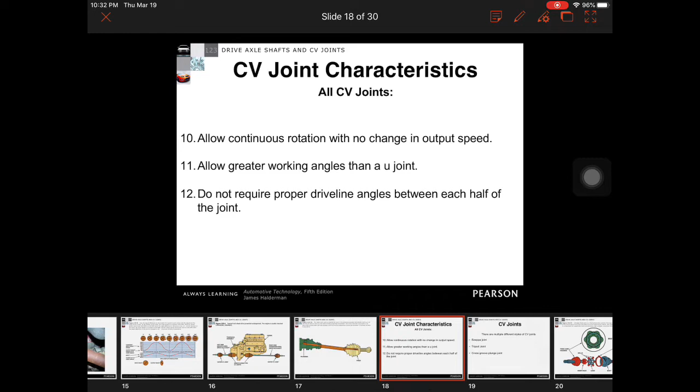I want to hit on one thing here and let you guys know that there are going to be a couple different styles of CV joints. The first one is a Rzeppa joint, actually pronounced Shepa, just so you know. But however you want to say it, the Rzeppa or the Shepa joint is the first joint we have, and then we have what's known as a tripod joint, and then a cross groove plunge joint. Now I do want to stress that there are actually a couple different extra styles of joints, but these are probably the main ones we're going to classify them into.

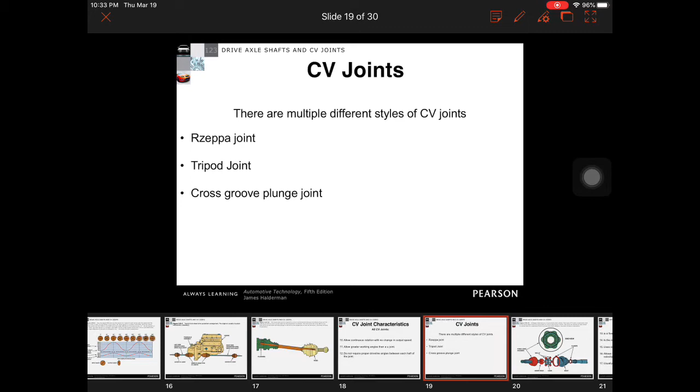So if you guys have any sockets and you've ever used a U-joint swivel, you know that you don't want to use those on an impact, because with an impact they get to be really dangerous. However, a CV swivel is going to be something really similar to this, maybe not quite so complex, but those are great for use on an impact. They don't really give you any fits, they're not dangerous to use.

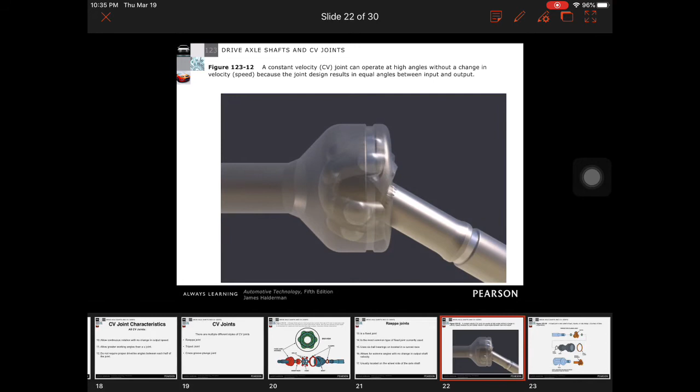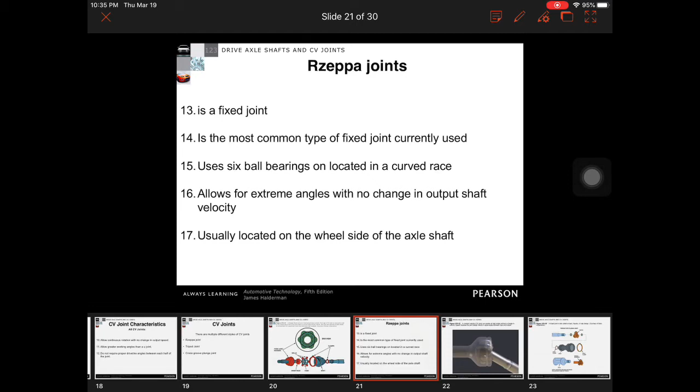Okay, so on Shepa joint or Rzeppa, one thing we need to know is it is a fixed joint, and it is probably the most common type of fixed joint currently used. It's going to use 6 ball bearings located in a curved race, and it allows for extreme angles with no change in output shaft velocity. It's usually going to be located on the wheel side of the axle shaft.

And typically we'll find the fixed joint out by the axle or out by the wheel and the hub, because there's not a whole lot of extra clearance for anything to move, because your spring and your strut assembly and your A-arm and everything is kind of right there, so it's hard to have any extra room.

Now that's actually a plunge joint, which means as the suspension moves and the distance between the transmission and the wheel changes, our CV shaft is able to move in and out a little bit. This also has to move because when we turn the wheel, it changes the distance from the CV shaft to the transmission. So really this is just another style of CV shaft that allows us to transmit power while still letting the half shaft flex in and out.

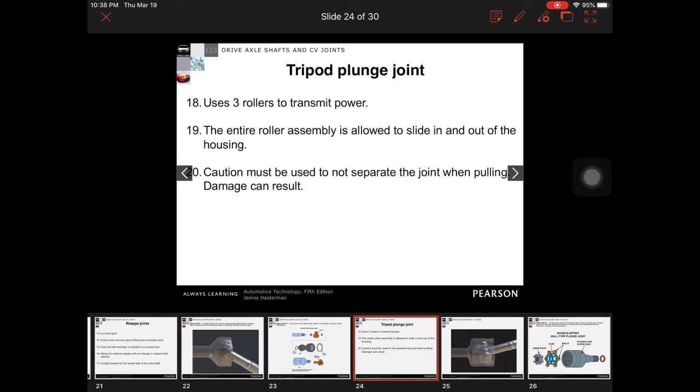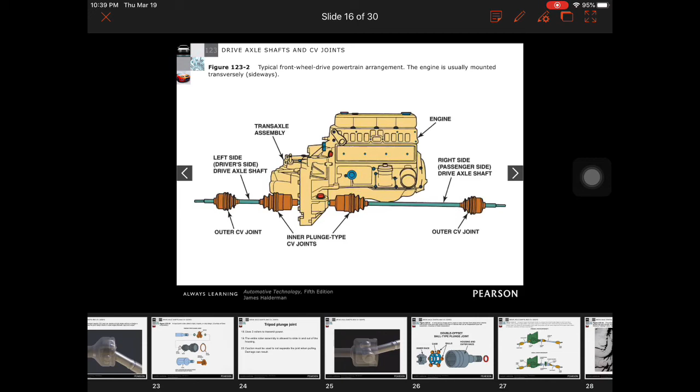And if that happens, you're pretty well stuck, and your only choice is to, at minimum, take the boot off with the one-time use clamps, then put it all back together, reassemble it, and use it. So it's something we want to be careful about, because if that happens, you're kind of screwed.

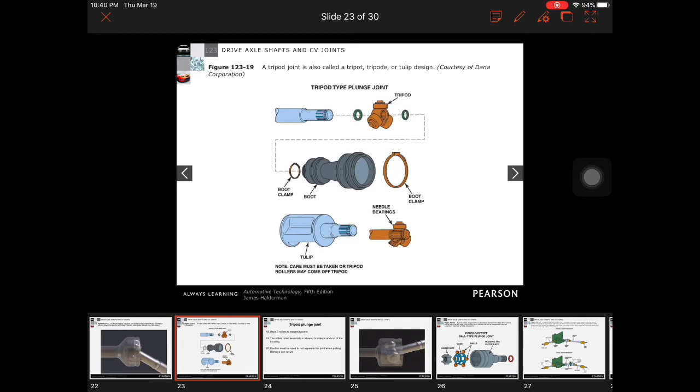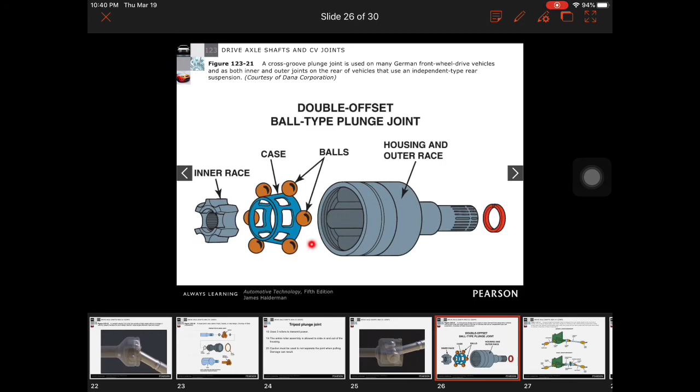I do want to let you guys know it doesn't mean we have to have just those 3 bearings. We can also have something called a double offset ball type plunge joint. Think of it basically like a tripod plunge joint, but the difference is this one actually uses 6 balls instead of those 3 rollers, and it's moving in and out. Same issue - you pull it out too far, the balls are going to fall out and lay in the boot, so you still have to be careful, and all the same rules apply. But you could see something that looks like this as opposed to this.

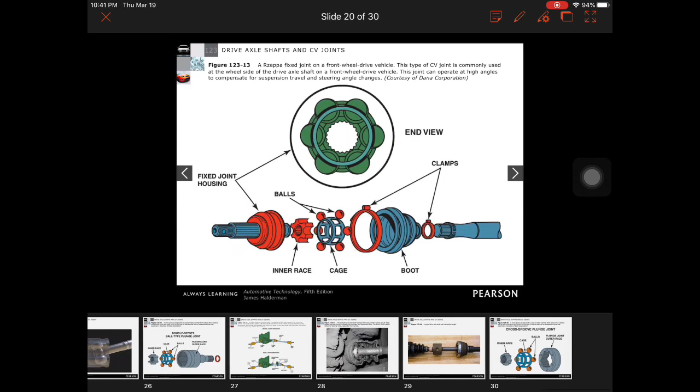The one thing we are going to be certain about is that every vehicle... where the heck's my picture? Work with me here. The one thing we are going to be sure about is that we are going to have a fixed joint and a plunge joint on each CV shaft. We have to have some way to take up that slack.